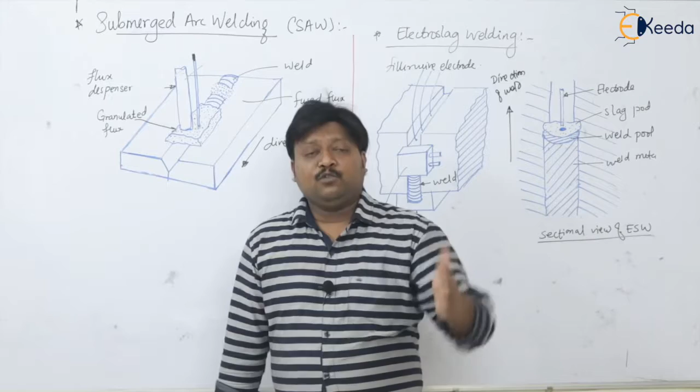If you look at this diagram, the setup of this welding is the same as that of gas metal arc welding that we have seen in the MIG welding process. There we have the wire reel, and the electrode is continuously fed into the joint. Same here — this is the electrode wire, the wire electrode, which is continuously fed into this weld joint.

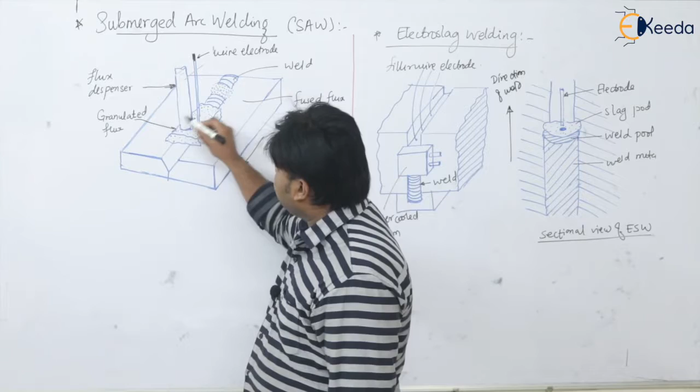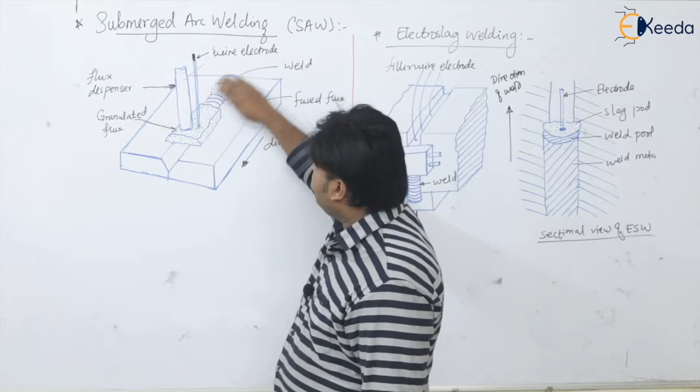Ahead of that, here is the additional thing — the flux dispenser or flux hopper. Ahead of this welding electrode, we use this flux hopper, containing the granulated flux. So the granulated flux is constantly supplied ahead of this electrode rod, so that the entire weld zone is covered with granulated flux. Some of the flux melts and forms a slag — this fused flux creates the slag, which covers our weld pool.

So the thing is, in this arc welding process, the arc between the electrode and the workpiece is completely submerged into this granulated flux, and it is not visible to the operator. That is why the process is known as the submerged arc welding process.

Now if you look at the power sources used in the submerged arc welding process, we can use both AC as well as DC power source, both constant current type or constant voltage type power supply. Whenever you go for higher size or larger size electrodes, it is preferred to have the constant current type.

Now look at the process — we are using granulated flux over the weld pool. If you think about welding positions for submerged arc welding, it is very difficult to put this entire flux in a particular position, like overhead welding or vertical welding. So it is quite difficult. This submerged arc welding technique is only suitable for the flat position or down hand position welding technique — that is the only position possible.

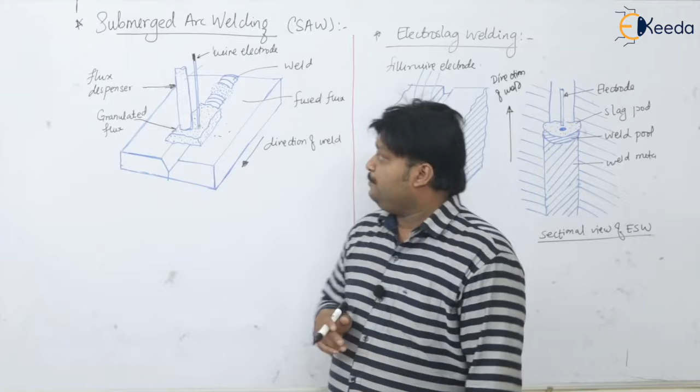So this is about the submerged arc welding process, which is suitable for joining plate thickness up to 75 millimeters in a single pass. Very important — so some keywords I will write here so that it is very easy for you: this is a faster welding process.

Then we can go up to the electrode size or large size electrodes, and current condition up to 4000 ampere, which will give us the maximum deposition rate up to 20 kilogram per hour. It will also give us the maximum welding speed up to 5 meter per minute.

And very importantly, how much can be welded in single pass? Single pass plate thickness up to 75 mm can be easily welded.

So here the entire weld zone is covered with this granulated flux. Please remember that unused flux can be reused by collecting and once again putting it in this flux dispenser, or this is also known as the hopper. It is shaped like this. You can put here the granulated flux.

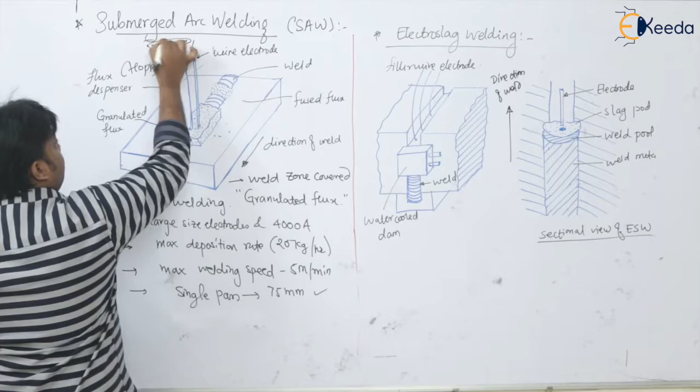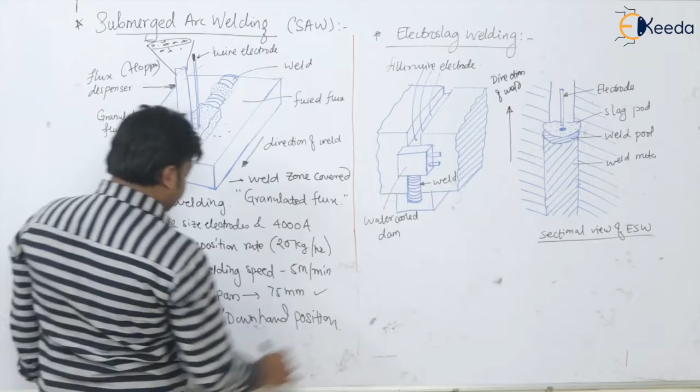So it is only possible for the flat or down hand position welding technique. So no contamination of weld, no spatter is going to be produced.

Any kind of power source, AC, DC, both constant current type and constant voltage type, but whenever the electrode feed, the consumable electrode size goes on increasing, it is generally preferred to use the constant current type. That is, we have already learned, the drooping machines or droopers we can use.

So these are the things about submerged arc welding. If you look at the applications of this, where submerged arc welding is used, it is used in pressure vessels, nuclear reactors, bridges, structural frames, and many other applications like automobile frames.

After seeing the submerged arc welding process, let us see the next process, which is electroslag welding, that is ESW. Electroslag welding is basically used for welding large plates with or without using any edge preparation. No edge preparation is required, though we can join two very thick plates.

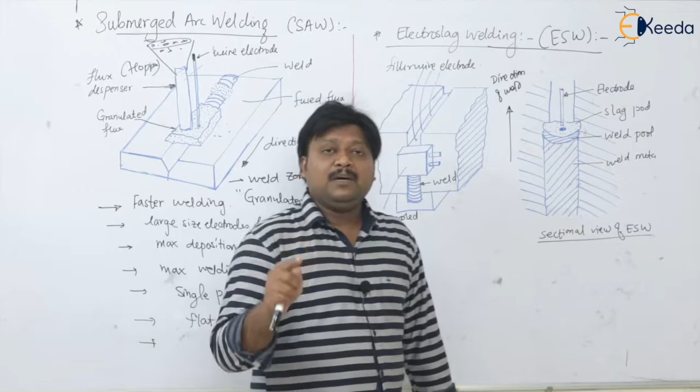It is essentially a single pass welding process which uses a consumable electrode to fill the gap between these two heavy plates. Please remember, it is essentially single pass. It is done only in a single pass, and here the consumable electrodes are used for filling the gap between two heavy plates.

Here the heat obtained for melting of the electrode as well as the plate is from the arc. Once we melt the fluxes, the slag is formed, then the arc is put off or extinguished from the weld zone. Now for the heating, the resistance of this molten slag is used.

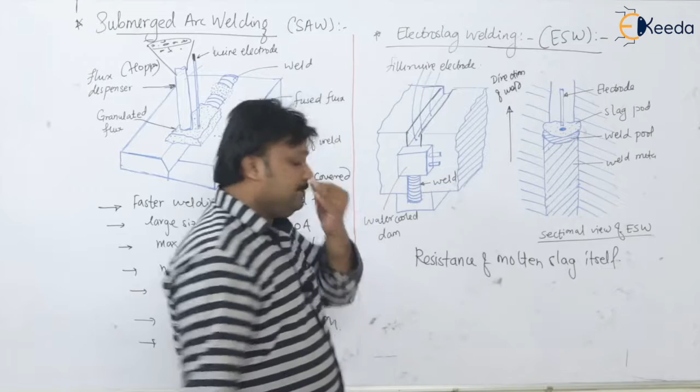Now you can see the diagram shown here. These are the two heavy plates. These are the filler wire electrodes which are going to get consumed there to melt the plate and fill the gap between these two heavy plates.

Now, we require a constant slag pool in this welding process to get effective welding. Continuous slag - the cross sectional view is also shown here. So here, this is the slag pool. We need it continuously throughout the welding.

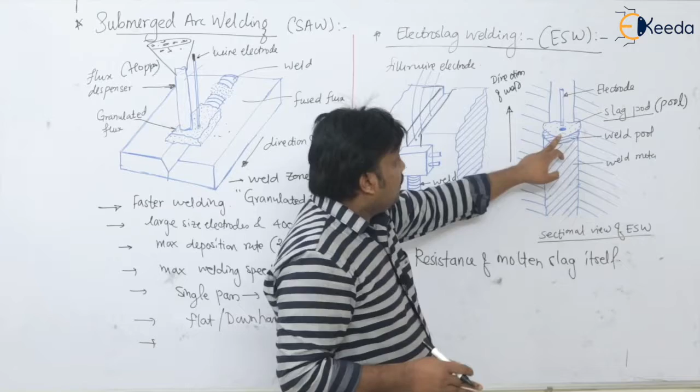So basically it is preferred to have this welding in the vertical position. So to have the continuous slag pool, we are doing this welding. ESW is always done vertically, so that we get the continuous slag pool. This is the weld pool and this is the welded weld metal.

Now to keep this slag always contained within this groove, what we are providing here are two water cooled copper dams to contain the molten slag into this groove. You can see from the front, one is here and another at the back here.

This water cooled copper dam will continuously move with the weld. So this is electroslag welding.

Basically in electroslag welding we can go up to a plate thickness of 200 millimeter in a single pass. Please remember, in a single pass we can join plates of thickness 200 millimeter, and no doubt we can also join plates less than 50 mm. But as we've seen in submerged arc welding, even a 1 millimeter plate can be joined by SAW, but it is not economical. In the same fashion, in ESW, if you go below 50 mm thick plate, it is not an economical process.

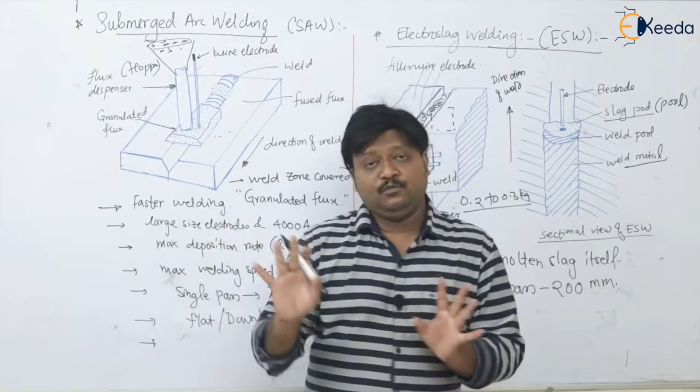Now if you look at the application of electroslag welding, ESW is basically used in high pressure vessels. Please remember, submerged arc welding is used only with pressure vessels, but for very high pressure vessels you can go for ESW.

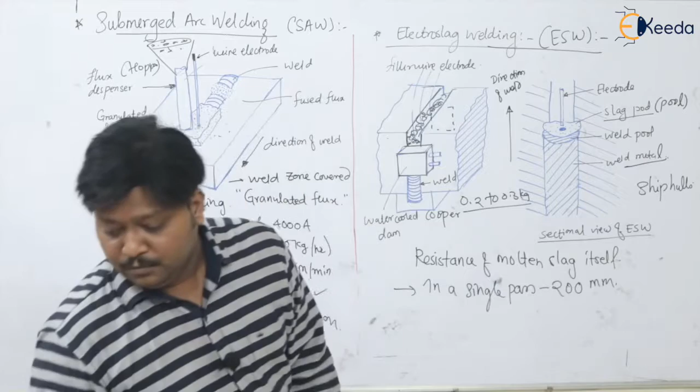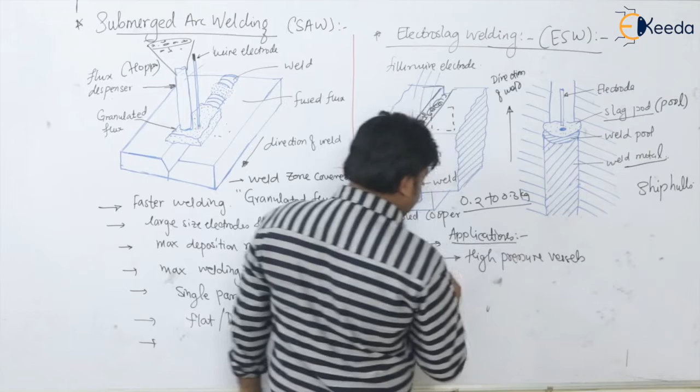Then we can use ESW in the frames of hydraulic and pneumatic presses, and it is also used in rolling mill frames.

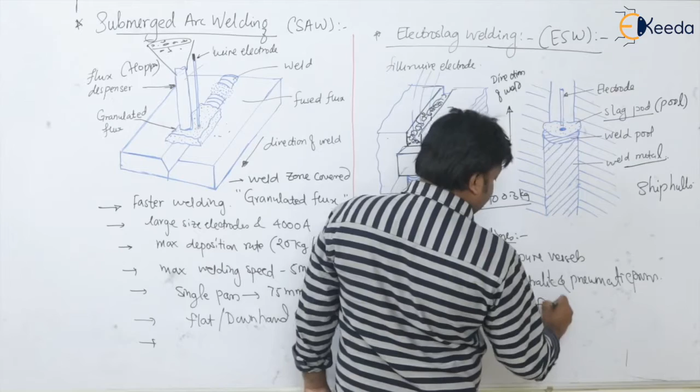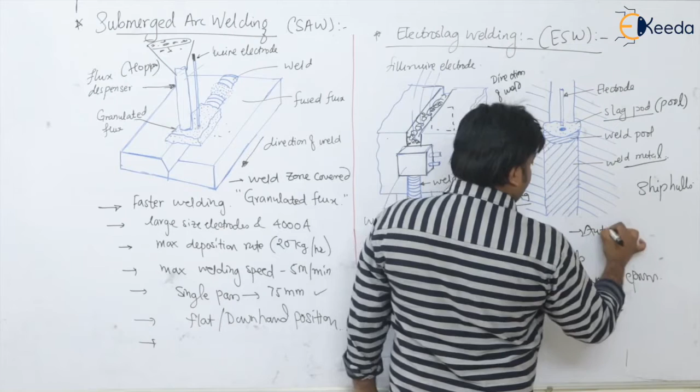It is used in ship hulls and also in automotive frames. So these are the applications of ESW, up to 200 millimeter in a single pass.

So in this way, students, we have covered arc welding classification: direct current welding, AC welding, then TIG welding, MIG welding, submerged arc welding, and electroslag welding. Now let us see how the question is going to be framed on this.

You will be provided, in one column, the welding process, the arc welding process, and in another column, the limitation of joining thickness of the plate in a single pass.

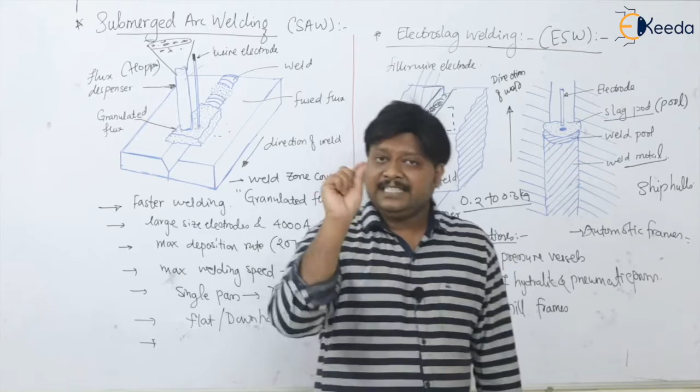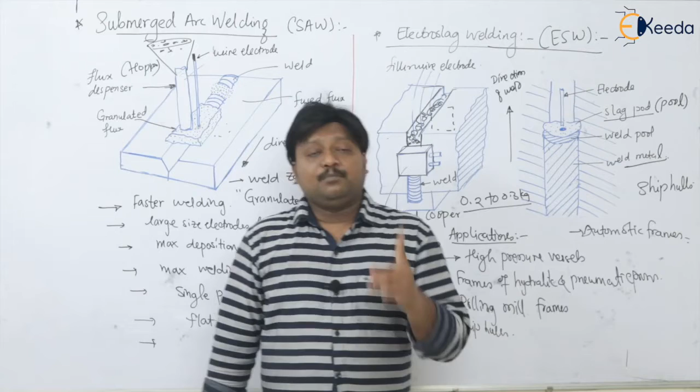So TIG welding, in a single pass without filler rod, we can weld a plate thickness up to 5 mm. MIG welding, in a single pass, up to 30 mm. Or more than that we can go, but weld spatter will be high because we have to reduce the welding speed again, so spatter will be high, but up to 30 mm it is okay for MIG.

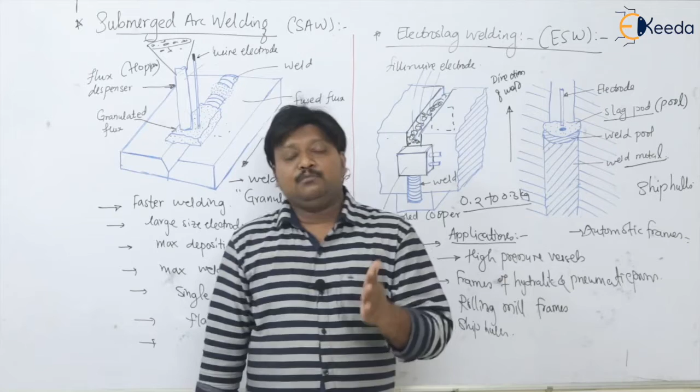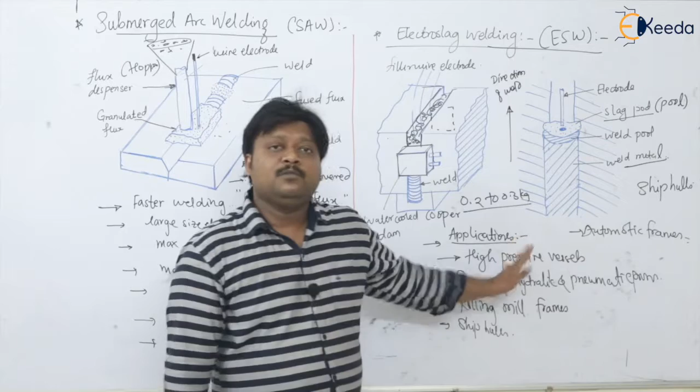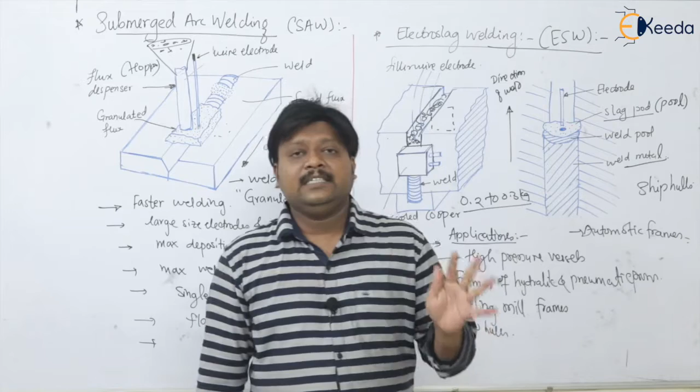Then SAW, up to 75 mm in a single pass very nicely, and ESW in a single pass up to 200 mm very nicely. So these are the arc welding processes we have completed. Thank you.